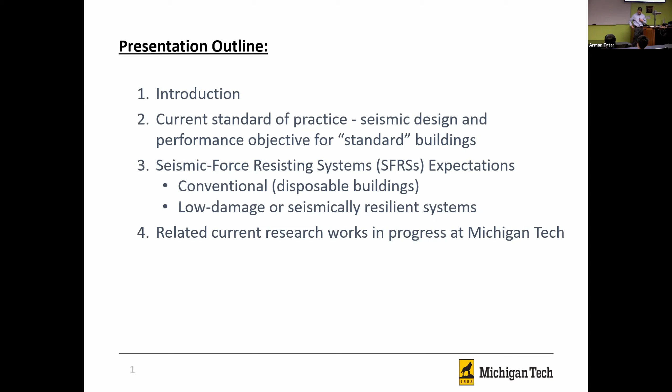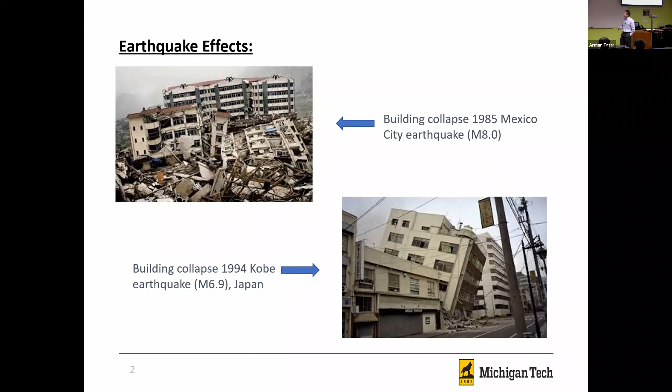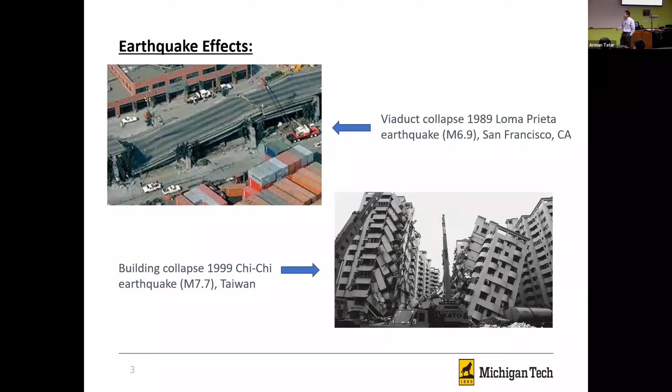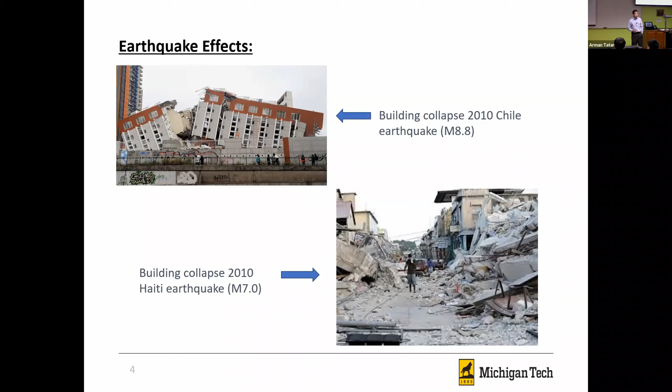Earthquakes - I think it's pretty well understood that earthquakes can be very devastating. These are images that obviously aren't the way we're supposed to design our structures, so these are all extreme events. Some viaducts, building collapses - Loma Prieta, the Chi-Chi, building collapses in the Chile earthquake, and the Haiti earthquake. These are all relatively recent events, and there's a most recent 2018 in Taiwan. What's kind of worrisome is that these are relatively modern cities that these are happening in, modern structures. So the question is, what can we do to improve this or actually prevent this?

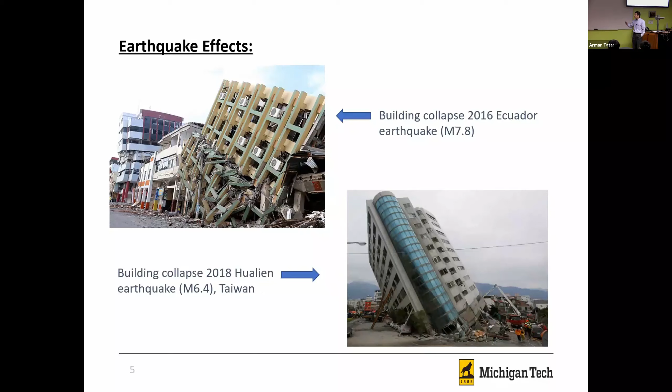A little background on seismic design for those who haven't necessarily had the experience or taken a structural dynamics course. As an undergraduate, we all take steel design, reinforced concrete design, timber design, and we're designing for gravity loads. But until you get into a graduate level course in structural dynamics, you realize we have to consider lateral forces as well - the main two being wind and seismic. There's a big difference when we design for seismic compared to wind. For wind, we essentially design for elastic level forces, but for earthquakes we design for inelastic response, for reasons we'll get into.

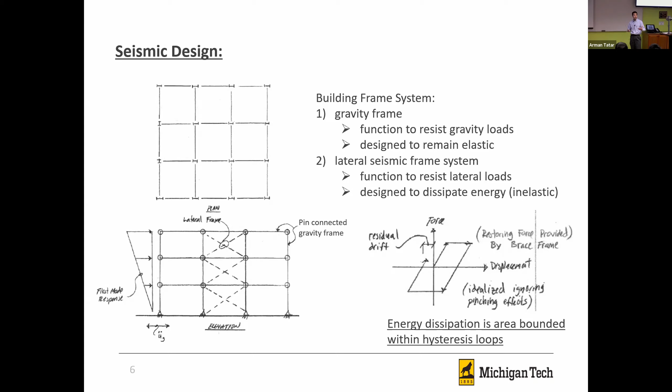But if you take a look at the zero force, there's going to be a point where the building will settle. The earthquake will stop shaking, the building will stop vibrating, and then you'll have a point where there's zero force on the building. So if you take a look at that simple plot, at the zero force location, wherever that hysteretic loop crosses is your residual displacement. That means you're going to have a building structure that has a residual lean. And if you have a residual drift, that means your building can be susceptible to P-delta effects under self-weight, or from cascading seismic events such as aftershocks. So that's a cost that we accept when we accept these big energy loops: we can potentially get large residual displacements at the end.

So seismic loads. How do we calculate seismic loads? Well, this is the equation of motion right here. One way is to solve the equation of motion, and typically, obviously, it's not practical to do that by hand. You would do that in a program such as OpenSees, SAP2000, or whatnot that will actually do the numerical integration for you, utilizing the integrator in the program.

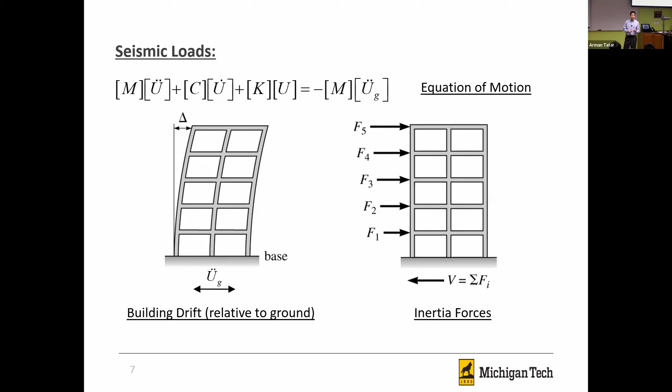But the problem with, I wouldn't say the problem, but the nonlinear response history analysis that you would conduct in, say, OpenSees, you have to have a numerical model. And numerical models require, if you want to consider what the inelastic response is, degradation models of how you properly model your connections and things like that. And computationally it becomes very expensive. Oftentimes, at least when I was in practice, it was very seldom done, depending on what you're designing, but more often than not you're looking for an easier solution or approach.

Now, the reason why I brought this up is because if you look at the seismic response coefficient C sub S, there's a value S sub DS, which is our spectral acceleration, divided by R, divided by I. I is what we call the importance factor, typically 1 for typical buildings. So essentially what you're doing is taking the spectral acceleration, which represents the maximum acceleration response you're going to get on your building depending on your site soil conditions, and you divide it by this factor R. The R is the response modification factor.

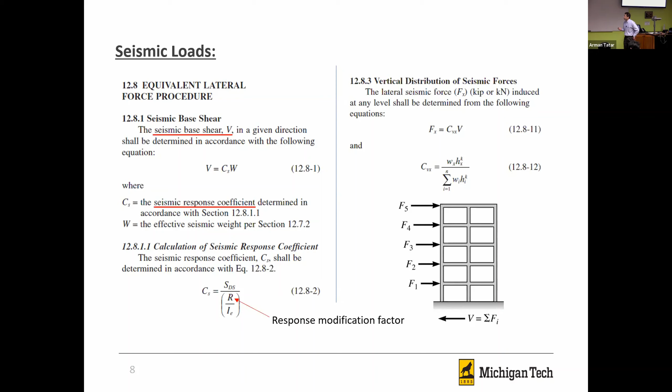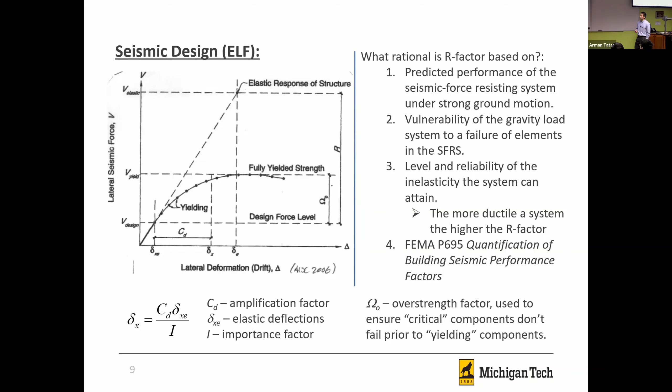This represents the actual response of our building, the actual forces that we would see on our building. But for design, we take the expected seismic force on our buildings and divide it by this factor R. Once you take that spectral acceleration divided by R, we're designing our building in an area where it's going to be damaged. It's going to yield, okay?

And then there's these other components, this delta sub X and this omega factor. These are all factors, multipliers that we use to multiply our elastic response to basically get the response in the inelastic range. For example, if I'm trying to figure out what my building displacement is for a design event using the ELF procedure, I have to multiply by the C sub D amplification factor, which could be on the order of 2 or 3, and that represents what my actual displacement is going to be based on damage.

So the issue is, what do we use for R, and how confident are we in our building to use this value of R? This R value is all based on predicting the performance of our seismic force resisting system under an earthquake, factors on how ductile our building is going to be. If we have a ductile system, meaning it can yield a lot before fracturing, then we can typically use a larger R.

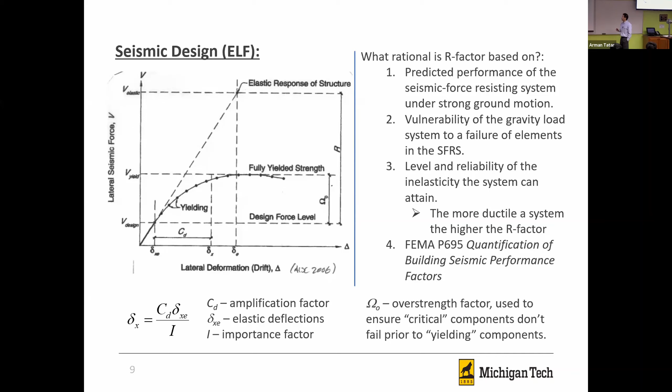In essence, it comes down to reliability. And we can calculate this R factor using FEMA P695, which is a probabilistic framework specifically designed to quantify these building seismic performance factors.

That being said, we know for earthquakes, our building is going to sustain heavy damage, and this is the design level earthquake. This is an earthquake with a return period of 500 years to 2,500 years. So we know that it's going to be damaged.

This crumple zone is exactly what we do for buildings in earthquake engineering. We provide these crumple zones that dissipate the energy safely and predictably so that you can walk out of a building. Now, after the event, the building is about to collapse. In terms of the code, engineers can say, well, that's fine, we did our job - life safety, collapse prevention, you can get out of the building. I really don't care beyond that what happens to the building.

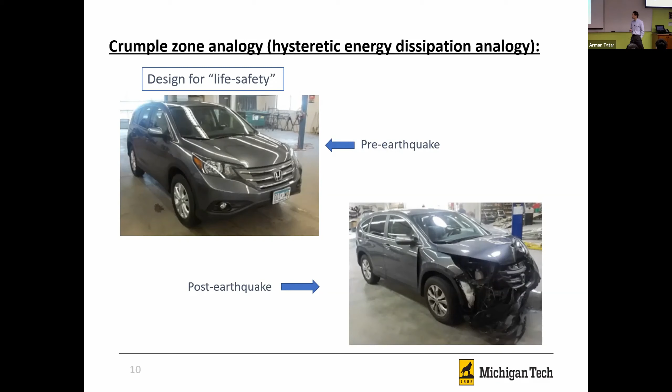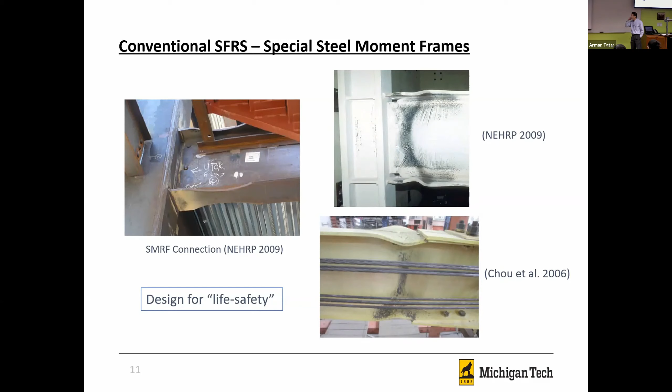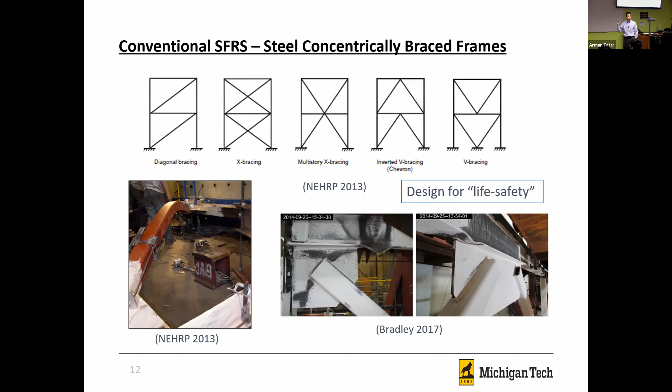So how do you repair this? It's one thing to test it, but how do you repair it? Even though this author is saying we're putting splice locations here so that during an event we can pull it out and replace it—just think of this: how are you going to pull that link out if it actually supports your floor? You're still going to have to go in and shore up the flooring to support the floor that this beam supports in order to take this link element out. But it's getting closer to more seismically resilient systems.

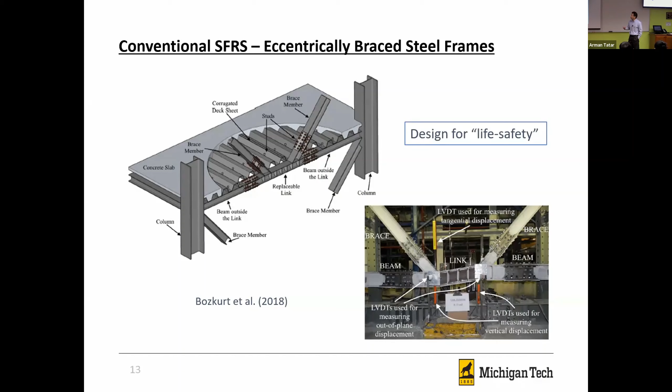Now I'm getting into my field of interest and research: seismic resilience. So what we just covered are the conventional systems—those are the expectations for how we currently design our buildings.

So I have a definition of resilience, taken from Dr. McAllister, from one of her papers. I'll just read it: resilience is the ability to prepare and plan for, absorb, recover from, and more successfully adapt to adverse events.

So we're just taking this concept and making our buildings seismically resilient. You might think, well, what is the significance of seismic resilience? The real motivation is in highly urbanized areas. Remember I started this presentation with photos of the devastation that can occur in highly urbanized areas—if we can have an infrastructure system and buildings that basically can recenter themselves and be easily repaired, that's a big deal.

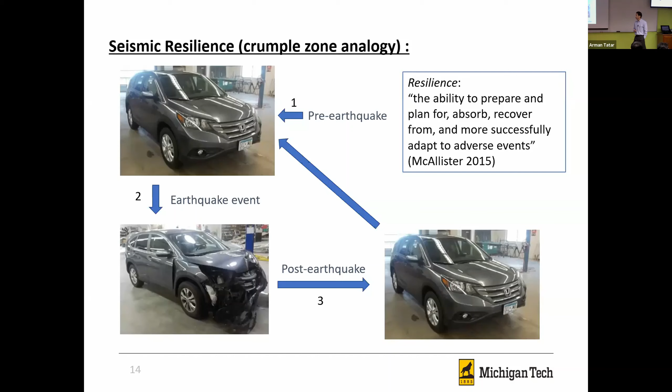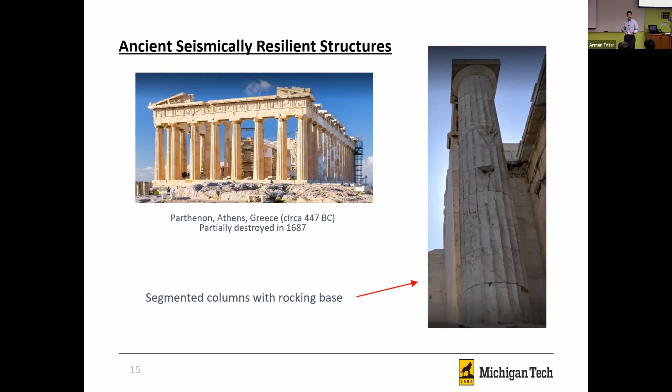Before I get into things, the whole concept of seismic resiliency is not new—the Greeks had it figured out. This is the Parthenon, and if you take a closer look at one of the pillars, they're segmentally built. What's not shown here is that at the base they allow for rocking, and they actually had energy dissipating elements down there. So they had rocking systems—when it comes down to it, seismically resilient systems are emulating this rocking.

Now in the United States, the whole idea of seismically resilient systems really had its big catalyst in the early 90s, with the PRESSS program, which stands for the Precast Seismic Structural System, by Professor Priestley. The real motivation behind this test was not originally for seismically resilient buildings, but it was an NSF project with PCI, the Precast Concrete Institute, looking for ways to build these precast structures very quickly. So they thought, let's eliminate connections and just tie all the beams and columns together with post-tensioning without any connections.

They tested it and realized, hey, these things recenter—there's not a whole lot of damage. So it really started with the PRESSS program. Then they realized these systems rock, and specifically, there's one of the connections: they got the column and the beams, with no connection, and just ran high-strength stranded post-tensioning unbonded strands through the middle for a clamping force.

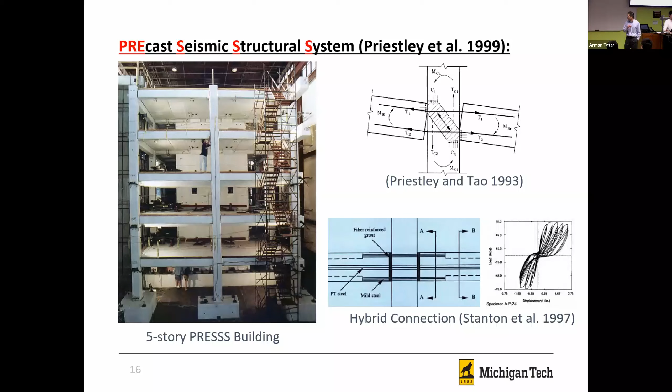So after the PRESSS test, researchers started saying, let's implement these connections into steel moment frames. So instead of having a steel moment frame that was rigidly connected, they said, let's put a rocking connection in there, and we'll put in some energy dissipators.

So this is very, if you look at that, that's the hybrid connection that Professor Stanton developed. So that being said, this is a steel moment frame with a post-tensioned beam-column rocking joint.

And if you take a look at the hysteretic response, we have the PT boundary frame, okay? We have the component provided by the energy dissipators, or what I call the structural fuses, and then the combined response below, which is your characteristic flag shape for a self-centering system.

Now, a couple of things to highlight: the PT boundary frame is designed to remain elastic. You want to ensure that the PT doesn't yield and that your beam-column, your PT boundary frame, remains essentially elastic. And so if you look at the PT boundary frame in figure A, it remains elastic, and as you can see, there's no energy dissipation.

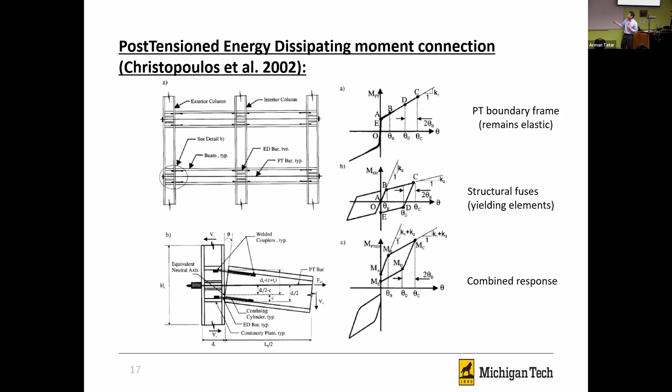So as the gap opens, if something's elastic, it wants to rebound to where it was originally. And so the PT boundary frame provides the recentering, and of course the energy dissipation comes from the structural fuses, which are designed to be replaceable. Here, the structural fuses, this is a very similar frame, but they're using angles.

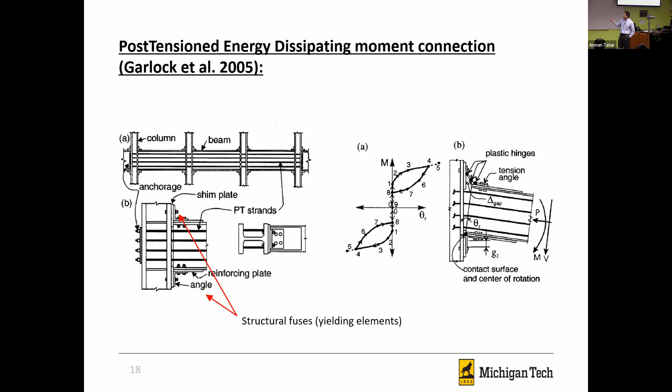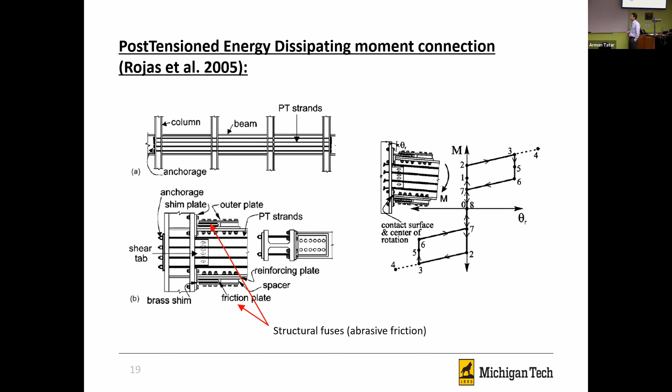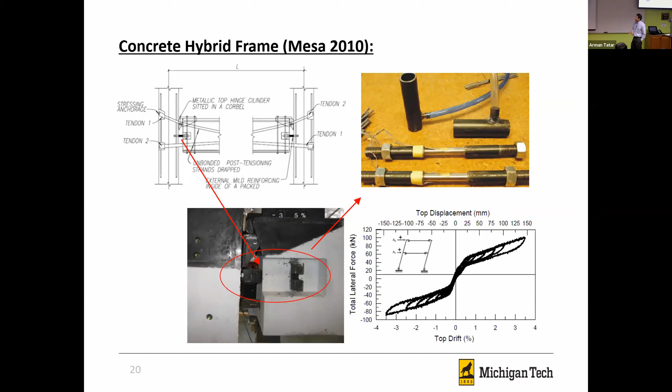Then folks went back to the precast concrete. Same thing: PT provided for recentering, and these energy dissipators, replaceable energy dissipators, provided at the beam-to-column joints.

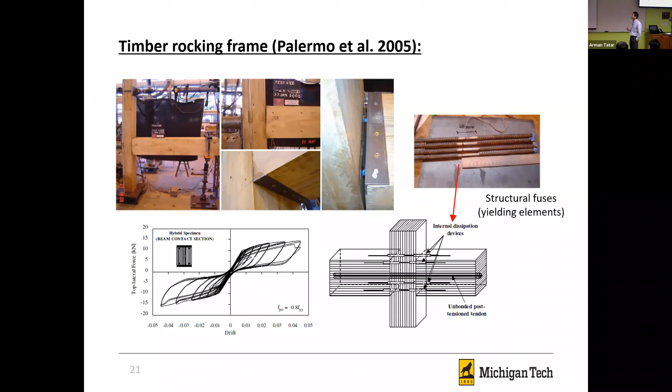So there's a common theme here. Everything's rocking, all going back to the Greeks.

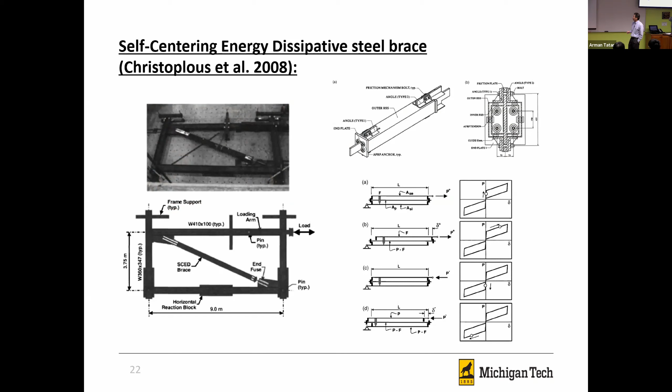And more recently, there's been a lot of movement in cross-laminated timber, or CLT. A lot of this motivation has come through mindfulness in sustainable practices. How do we make our buildings not only resilient, but also sustainable? And of course, one of the more sustainable materials out there is wood. It's highly sustainable, sequesters CO2, leaves a low carbon footprint.

But anyways, CLT actually has been a technology that's been around for about 30 years in Europe. It hasn't been until the early 2000s where CLT has been used as seismic walls, mainly because in Europe they don't have a lot of seismic activity, well, parts in Italy and places like that, but where CLT was being used was in low seismic areas where wind was driven.

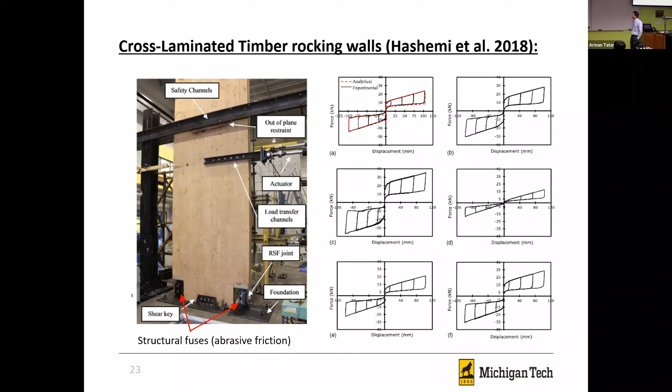This particular wall, there's a lot of research out of New Zealand that has been done in CLT rocking walls and energy dissipators. A researcher is using structural fuses based on friction at the base of the wall. So as this wall rocks, as you push on it, as it cycles back and forth, you can see the flag-shaped loops being provided due to that response.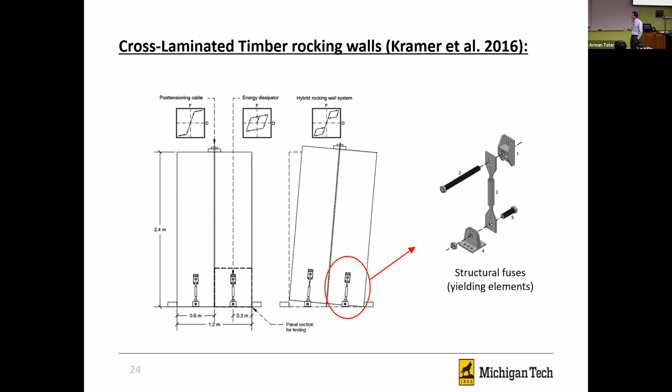And of course, there's some more with using yielding structural fuses. So that's kind of an overview of research done by others.

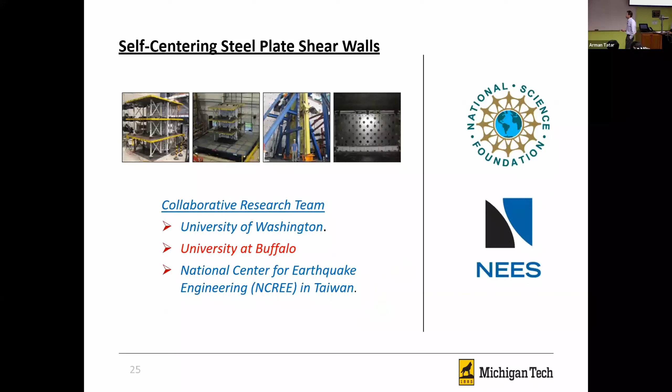So during my PhD studies at University at Buffalo, I developed, along with researchers at University of Washington, self-centering steel plate shear walls. So what is a self-centering steel plate shear wall?

First, I think it's best to define what a conventional steel plate shear wall is, because this is a system that's already in the code that's accessible to designers. All a conventional steel plate shear wall is, is just a special moment frame with an infill steel web plate. It's essentially a dual system, and it provides a substantial amount of energy dissipation through the web plate and also through the...

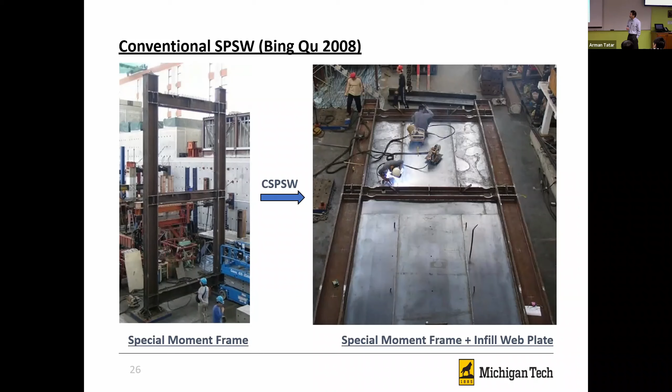SMF connections. So all we did was, again, going back to the rocking connection, we eliminated the rigid welded connection and replaced it with a beam-to-column post-tensioned rocking connection. So all the energy dissipation is provided by the infill web plate, the PT boundary frame, which includes the PT elements, all designed to remain elastic.

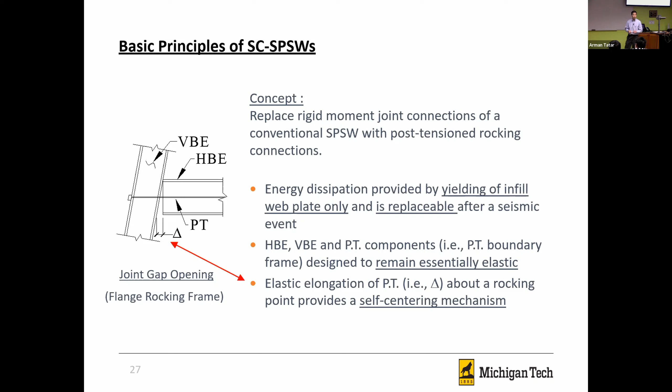This little picture here gives you a better idea of the self-centering mechanism. Essentially, when the beam to column rocks, you get a gap opening. That gap opening elastically elongates the post-tensioning, and that elastic elongation, the PT just wants to recenter. It wants to go back to where it was, as that provides a self-centering mechanism.

So energy dissipation on a steel plate shear wall, essentially the infill web plate is allowed to buckle in shear, and we develop the tension field action. If you take a look at the picture on the left, we're essentially developing the hysteretic energy through pure tension.

And one of the big assumptions that have been made in steel plate shear wall systems is that it's a tension-only behavior, okay? And if you look at the response down below, I've got the PT boundary frame, which is bilinear elastic, and then I've got the infill web plate.

So tension only simply means that if you look on there, I've got two quadrants on the force displacement curve, 1 and 2. So once I go through an inelastic excursion of 1, when the frame unloads, it unloads at A, and then you get a reverse cycle if you're doing a cyclic test. And if you push it back into the positive excursion, you're not going to dissipate energy until you regain that point A. Once you get to point A, you get virgin material, you dissipate further energy. So that's what we call tension-only behavior, and that's the assumed behavior of these SPSWs, which is ideal for self-centering systems.

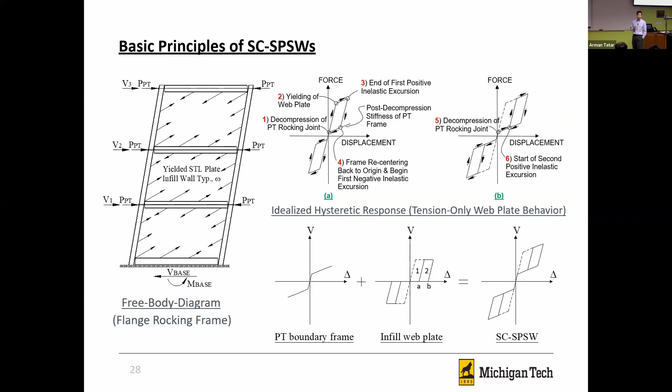So the rocking connections that we looked at, we looked at 3 different types. The first one up top is the flange rocking, and this is the system that all the other rocking connections we looked at were based on, that they rock about the top and bottom flanges. You can see in that cartoon picture there, I've got the rocking points for, in this case, a rightward drift location.

But the problem or the issue with this is that I'm showing a gap opening called delta. That is what we call beam growth. So what happens is, in order for that gap opening to occur, the beam literally has to push out on the columns.

It literally has to push out on the columns, and hence beam growth, right? The issue is when you have a diaphragm on top of that, a real building system. If you have a real rigid diaphragm on there, how is that going to affect the beam growth? You're either going to cause damage in your diaphragm, or the diaphragm is going to prevent your beam-to-column gap from opening. So that was the motivation for looking at these rocking connections down below.

I've got a centerline rocking connection, and the bottom one, which we call a top rocking connection. That was an original contribution by myself and my advisor, Bruneau. The idea with the centerline rocking is that you don't get the beam growth. You're not going to get the beam growth, but you do get some gap opening, so you get potentially some tearing still. But with the NewZ-BREAKSS frame, in theory, you get no tearing and no restraint effects from the diaphragm because you're always in contact with it.

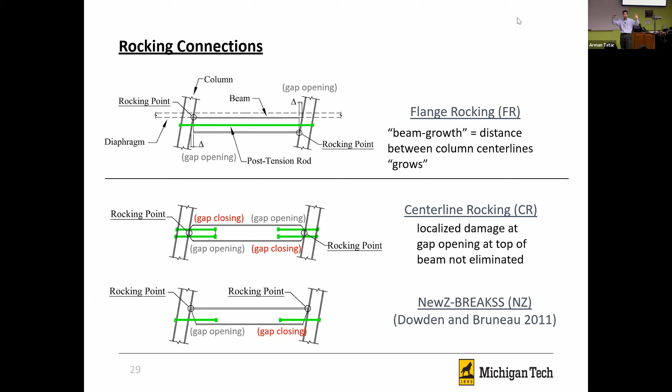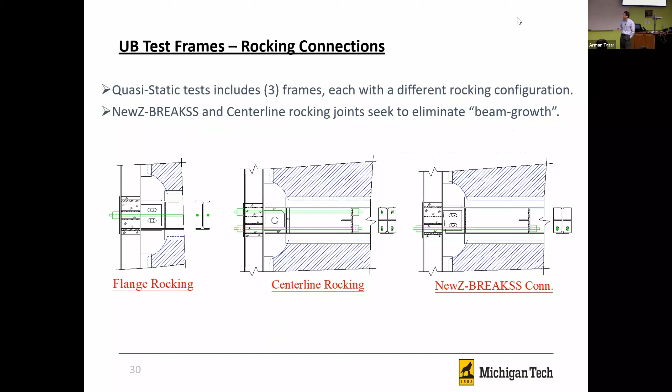That's the motivation. So these are the connections that we looked at, that we had our test frames: the flange rocking, the centerline, and the NewZ-BREAKSS. And these are our test specimens. We looked at full, third-scale tests, third-scale frames. We had solid infill web plate, and then we also looked at strips.

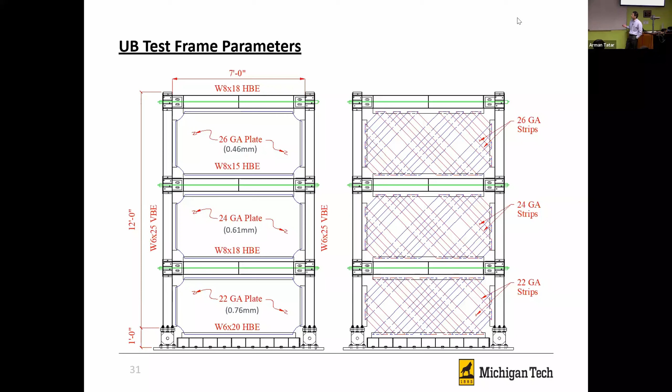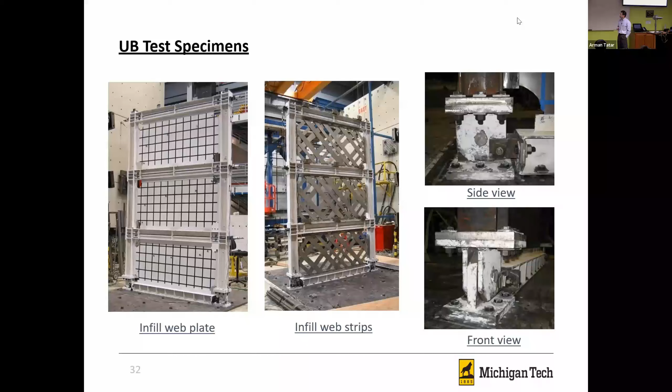Okay, and this is what the frames looked like. For these connections at the columns, we used an idealized pin connection. The idea was that if you had a standard conventional bolt connection, you could generate a plastic hinge there. Being that this is a seismically resilient system, we wanted to ensure that we did not develop a plastic hinge there, so we had a pin connection. So here's one of the static tests that we did.

Keeping in mind, the boundary frame is designed to remain elastic, right? All the energy dissipation comes through the web plate. As we cycle through these, you can see the damage that accumulates, okay? And no damage occurs to our frame. And then you can think of those mass plates as our rigid diaphragm.

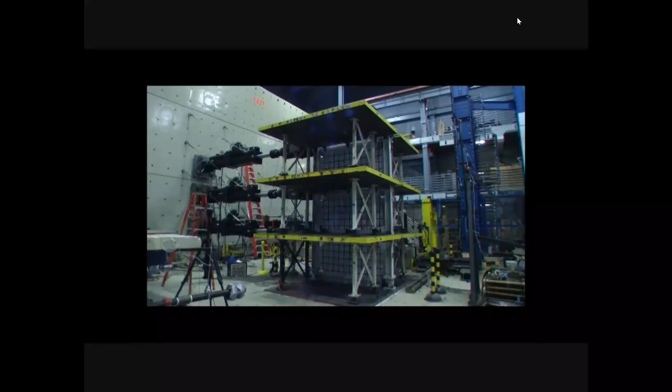So you can see all the damage that's occurring. And then finally, it gets to the point where the web plate actually literally tears away from the boundary frame. The point being is that after the event, the building recenters, and we can come in and replace those infill web plates without affecting the gravity system. So relatively easy, we can replace those web plates.

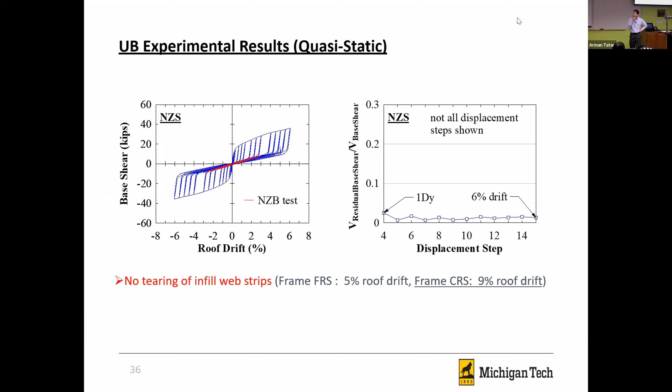So here's some of the results. This is the test with the strips. If you look at the force displacement response, perfect recentering, perfect kind of flag-shaped loop. And here's what it looks like.

Now, when we look at the test with the full infill web plate, the loops are pretty full. But one of the things you can notice is that we do have a residual drift, so to speak - at zero force, we have a residual drift, and it's actually by quite a bit. This came about because, remember, we had assumed that the infill web plates were tension only. Well, solid infill web plates are not tension only - they do have some compression strength, and that compression strength is what prevented the full recentering of this frame.

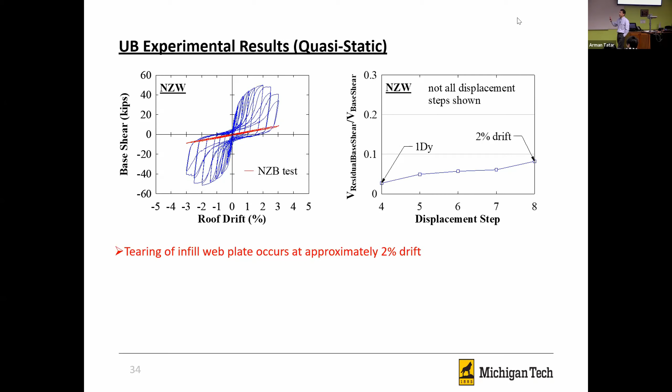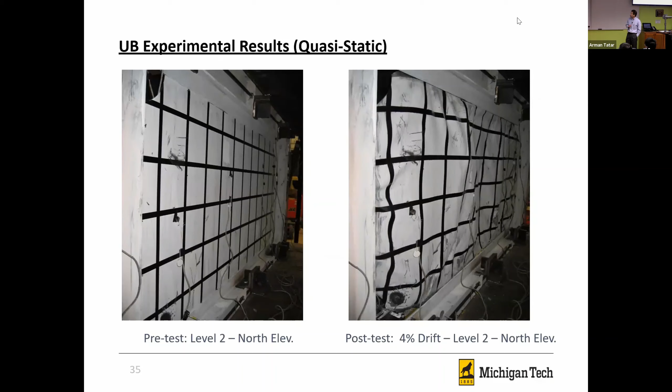At the start of this design research project, I did not account for that, but you can design for that by adjusting your post-tensioning, okay? But it turns out it's not that big of an issue for recentering, as we found out when we went to some shake table tests. But here's some plates, the damage before and after the test.

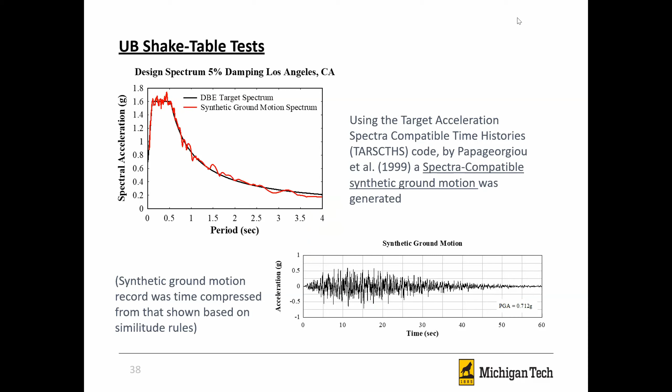Okay, so we also conducted shake table tests at University of Buffalo - I was very fortunate to have the ability to do shake table testing there. So we took those exact same frames and put them on the shake table. We used a synthetic ground motion - there's our response design spectrum.

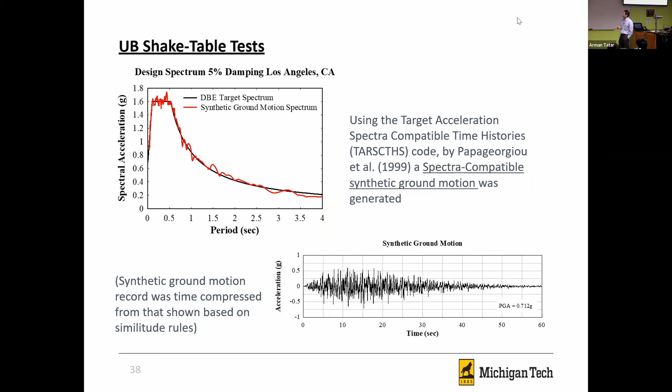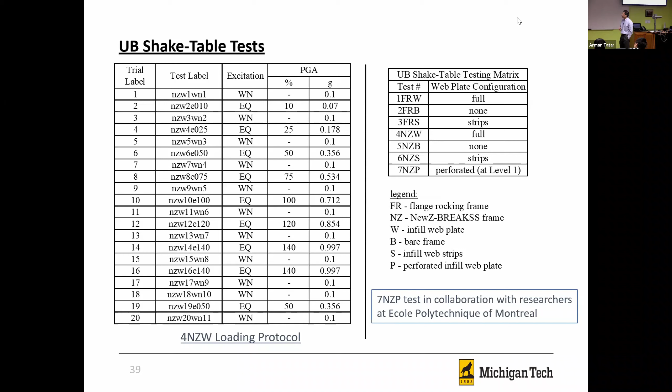Then the loading protocol essentially was that we did a scaled amplitude test. We had our ground motion and incrementally amplitude-scaled it because we didn't know how the frames were going to behave. So we started out with low level shaking up till very high level shaking. And then we did white noise tests in between to do identification tests to track the dynamic properties and see how they changed. But this is just a sample loading protocol. Here's the system on the shake table, and here's a test.

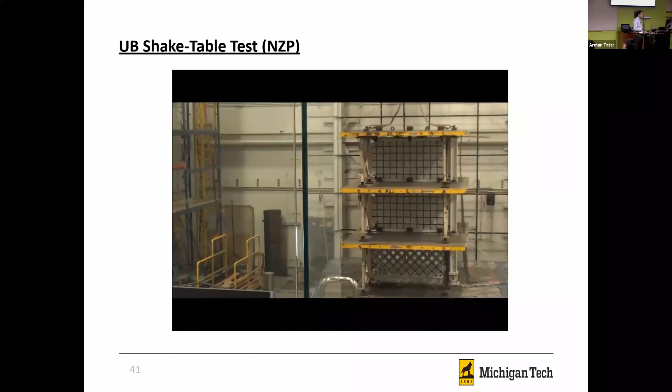It's actually more exciting when you're there in person, but that was an example of a test.

Remember on the infill web plate it didn't recenter on our cyclic test? But we put it on the shake table, and for self-centering systems, typically 0.2% residual drift is what's considered recentering. If it's below 0.2%, it's recentered. That's simply the acceptable allowable tolerance for new building construction.

So you can look at each increment of earthquake test we did, and the system recentered just fine. For dynamic tests, the compression effects we saw on the static test were not an issue for earthquake loading. Here's the response due to the infill web strips, and again, recentering occurred at all of our tests.

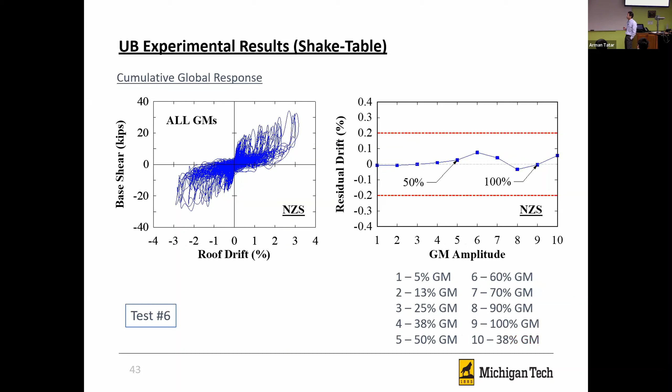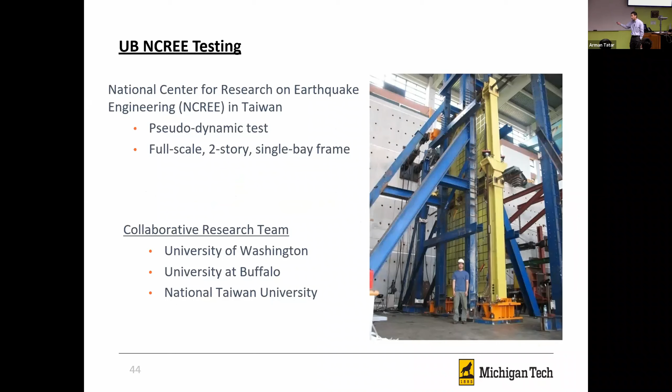I did some full-scale testing in Taiwan of that NewZ-BREAKSS frame. That's me standing by our specimen. We did pseudodynamic testing, which is basically a static test that emulates a dynamic test, and we ran it through 3 different ground motions, as shown.

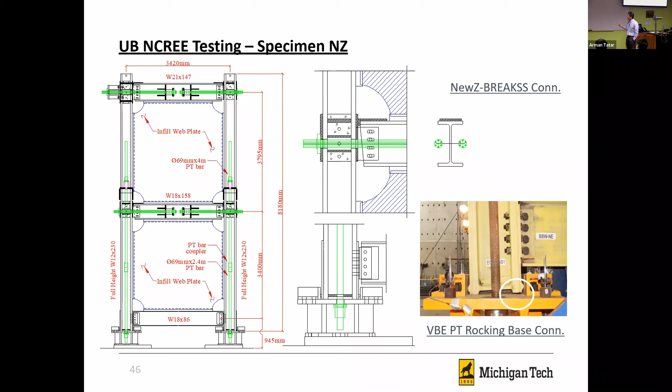For this particular connection, remember the UB test where we used a pinned connection to prevent plastic hinging at the base of the columns? Here we decided to use a rocking connection instead. You can see the base of our column, and this is what it looks like on one of the columns of our frame as it rocks. Anything that rocks is a natural self-centering mechanism, and the post-tensioning ensures that we recenter.

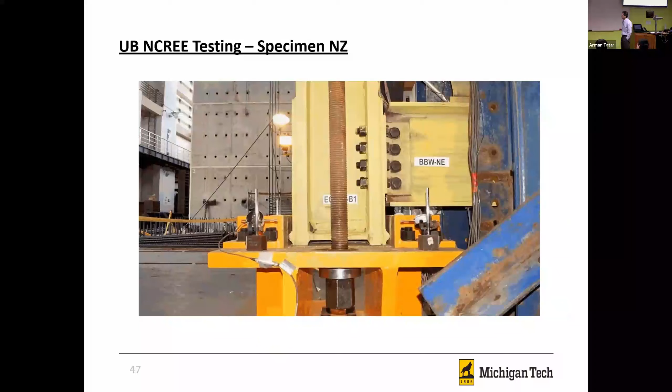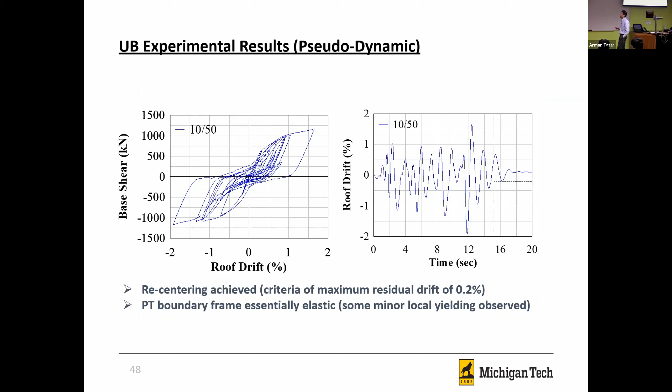So this is the response due to the design level earthquake, and you can see that the residual roof drift is within 0.2%, recentered just fine.

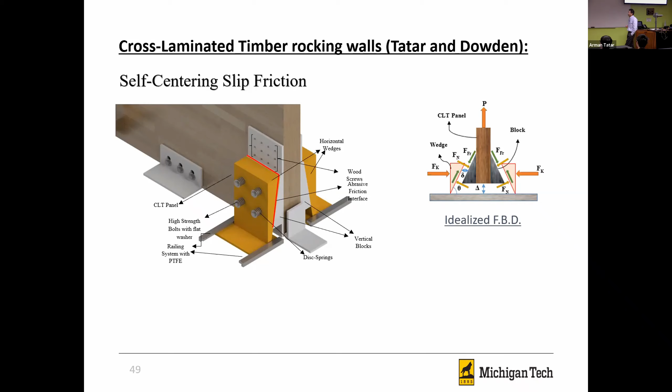On the right-hand side is an idealized free body diagram. As the CLT wall rocks, we've got these 2 wedges connected through the wall with high-strength bolts that have disc spring washers on them. As one wedge moves relative to the other, it compresses these disc springs, providing a clamping force. With that clamping force we create an abrasive friction interface and dissipate energy, and also provide some self-centering response.

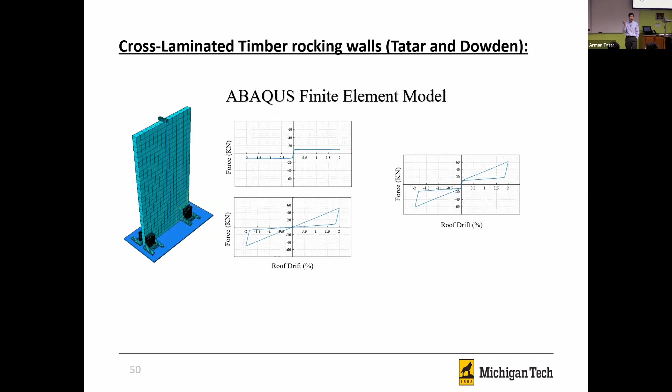We're getting ready to do some scaled testing in our lab. First we're trying to identify appropriate friction materials. We know we're going to use stainless steel for one, but the question is what to use for the other materials. Right now we've tested leaded tin bronze, and we've got pretty stable loops, with coefficient of friction ranging between 0.2 and 0.4. We're also going to try a thermally sprayed aluminum, and should have those results by December, which will inform which material to select for our dampers.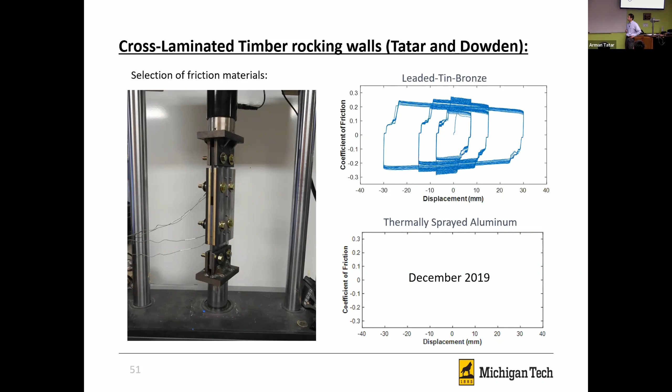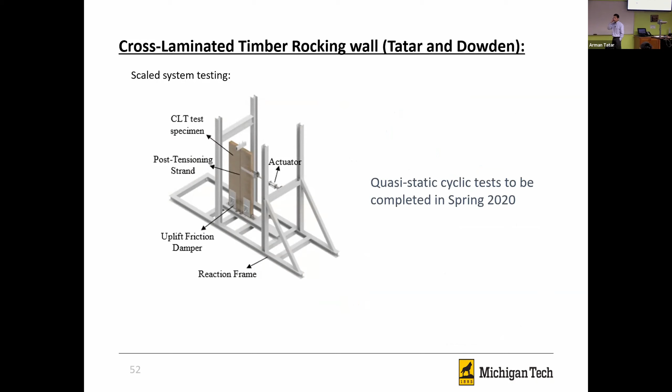Here is our sub-assemblage test that we'll be doing in our lab. We've got our CLT wall, this is the existing reaction frame we have, and we've got the uplift friction dampers shown there. We should have these tests completed by spring 2020.

Another project we're working on: we're taking this NZ frame with steel plate infill structural fuses, and we're also taking that same PT boundary frame but using BRB structural fuses. The question is, what is the collapse fragility of these systems? We're going to run IDAs, and from those we'll develop collapse fragility curves. Using those curves with FEMA P695, we should be able to come up with preliminary seismic performance factors.

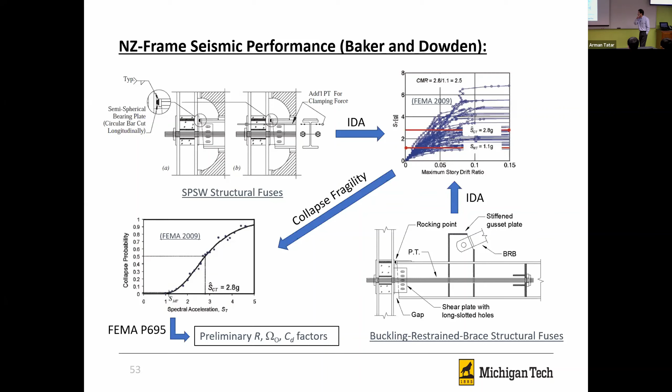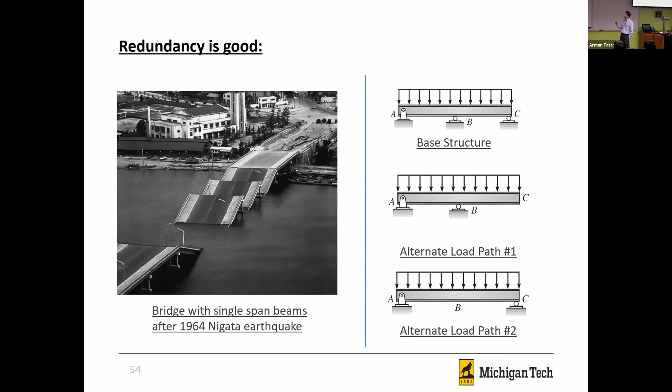So the other item I wanted to point out is redundancy as structural engineers is a good thing, especially in earthquake engineering. Here's a simple span bridge, simple spans, and then you've got beam on the right-hand side, redundancy. If you have redundancy, you pull one element out, you can still support it, right?

So one of the things we're looking at is these seismic resilient systems. They don't have a lot of redundancy because the structural fuses themselves are pretty small compared to conventional systems that have a lot more redundancy. They appear to be more robust, right? But here we're providing little elements, structural fuses, such that we can get a recentering response.

So one of the studies we're looking at is main shock, aftershock sequences. We designed our buildings with these seismic resilient systems to have structural fuses that are meant to be replaced afterwards. Well, when is the building going to be replaced? It could be months, a year, who knows? That being said, the buildings themselves are probably going to be more vulnerable to potential aftershock sequences, which are common.

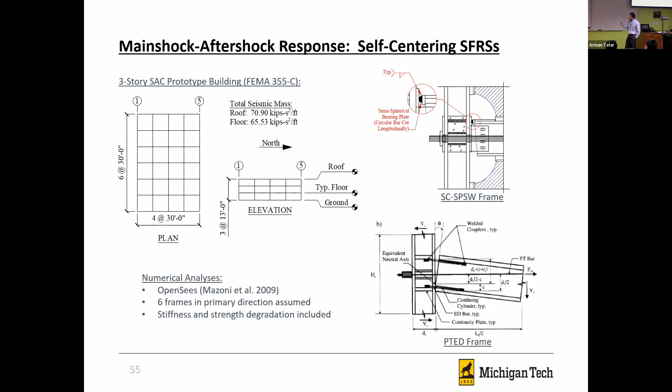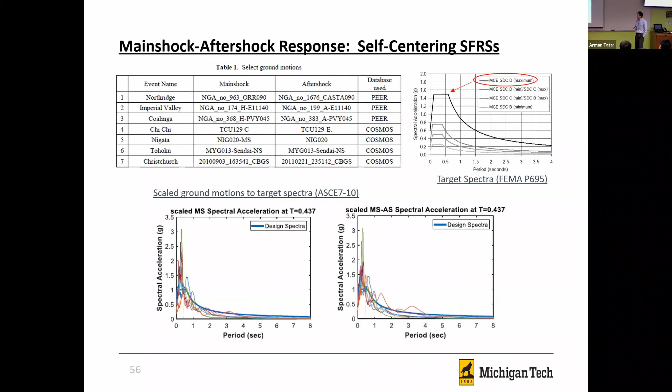So we ran a small study, which is part of a larger study. We selected 7 recorded main shock, aftershock sequences. We scaled the ground motions to an appropriate response spectra, and down below is the response spectra of each scaled ground motion. We ran nonlinear time history analysis in OpenSees to see what the response was for these 7 ground motions. Our OpenSees models included both stiffness and strength degradation, so the results are relatively reliable.

We did this for the steel plate shear wall, peak interstory drift. The results are actually uneventful, which is good. We've got 2 plots, one running just the main shock, and we ran another run with the main shock aftershock sequence. What this shows is that the main shock aftershock sequence does not provide us a response larger than the main shock. In other words, the damaged building after the aftershock, the response doesn't exceed the main shock event.

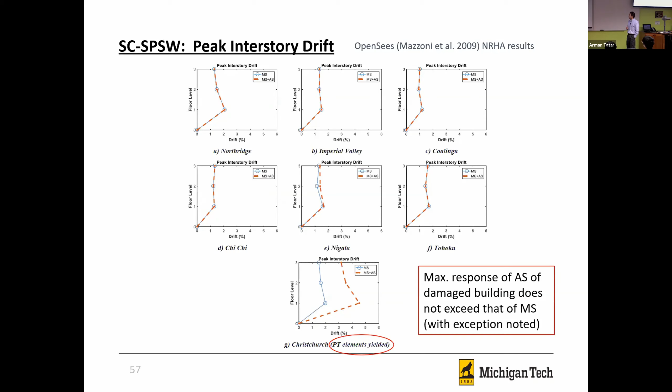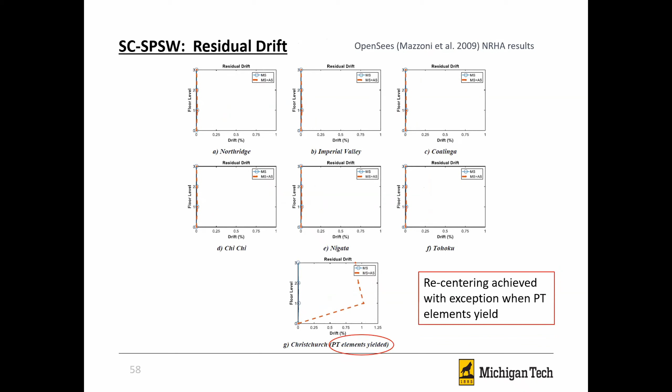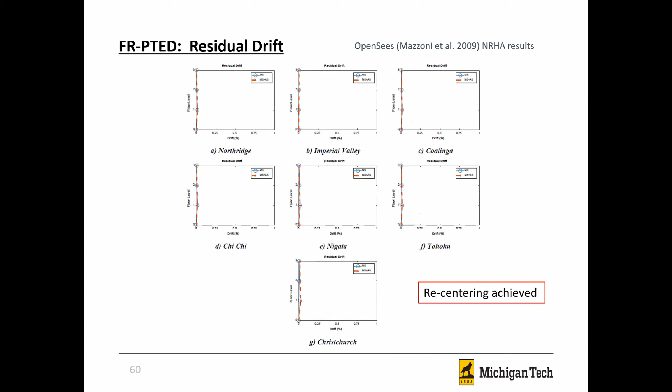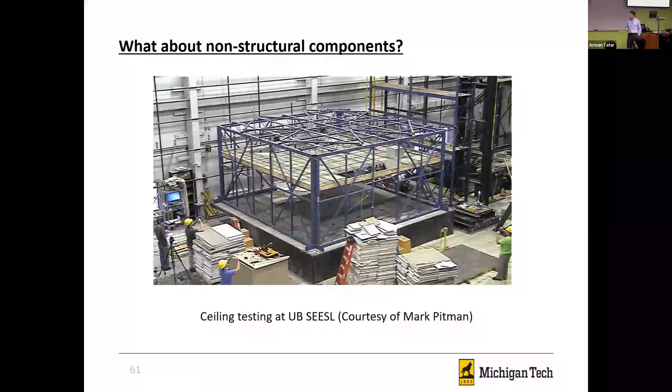So the last thing I want to leave you with really quickly is we talked about structural resiliency, but what about non-structural? So what I wanted to leave you with was some ceiling testing that I did at SEESL, but everything we talked about was building resilience for the structure. Obviously resilience includes not just the structure, but all the non-structural components that go along with it, and that's something that also has to be addressed.

The first place to start is to ensure that we have a structure that we can work with, that's seismically resilient. So with that being said, this is SEI.